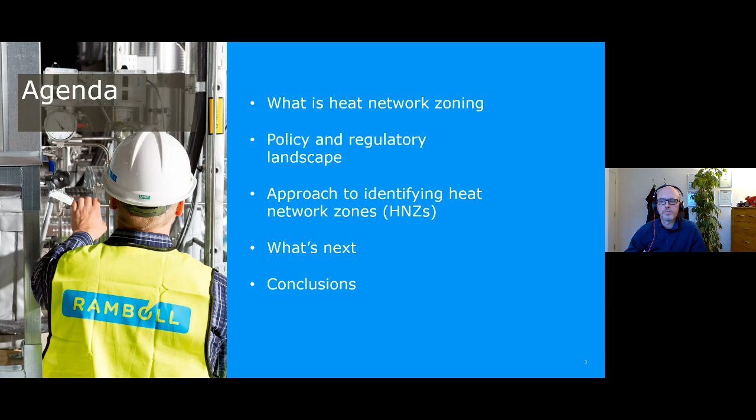So very briefly, what do we mean by heat network zoning? It's about energy planning, specifically for heat networks in this case. So we need to consider that a heat network is a long-term investment in energy infrastructure. It has the potential to cover very significant geographical areas, and by virtue of that, there are multiple stakeholders involved in both the planning and the delivery of district energy or heat networks specifically.

So when I talk about heat networks, we shouldn't overlook the fact that there may be opportunities for cooling networks as well to be developed alongside that. So the importance here is that because of the long-term nature of these infrastructural assets, they should be and need to be planned strategically. We're talking 50, 60, 70 year investment projects here.

The zones themselves are focusing on trying to identify where heat networks could be the optimal technology choice within a particular geographical area. So recognizing that there are multiple potential solutions to decarbonize heating, of which district heating is one, but by no means the only technical solution.

The typical approach, which we'll come on to shortly, is to be very much demand-led. So we're looking at areas where there is a high density of energy demand, of heat demand. But critically and importantly, as we move into the net zero future, we need to look at where there is availability of low carbon heat sources, of which Donna was referring to several in her presentation.

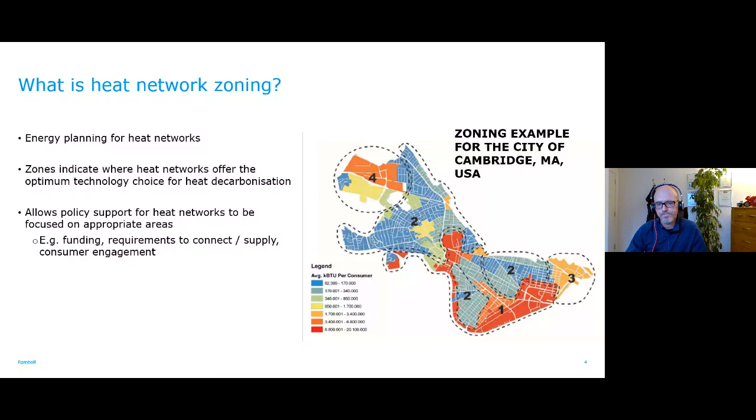The picture on the right is an example of some zoning that we've done relatively recently in a US city, in Cambridge. Next slide, please.

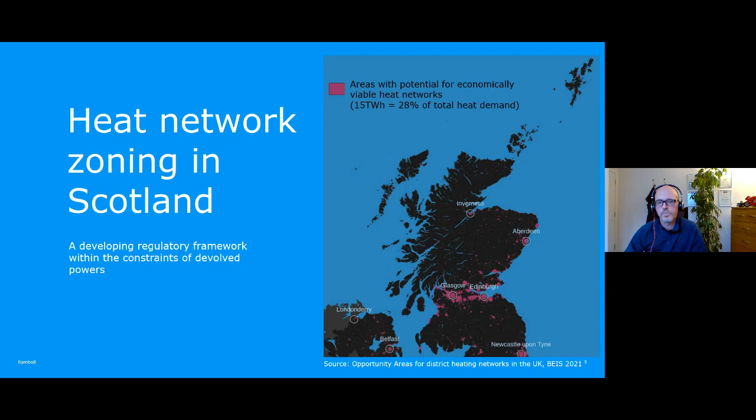The Heat Networks Act was legislated just this year, and that's a really interesting piece of legislation. And some of the key elements of that involve licensing of heat network operators. So the intention is to drive up standards and improve customer confidence in district heating, bearing in mind that it's still not a well-established technical solution in the UK. It will provide certain rights to the operators of networks, similar to what traditional statutory undertakings might already be used to and require to perform effectively.

Importantly, it will place duties on local authorities to review their regions in terms of the opportunity for district heating, and will give them the power to designate an area within their region as a heat network zone. And then lastly, there would be a permitting system. So it would provide the licensed operator with a permit, effectively an exclusivity to own, operate and develop a network within the zone.

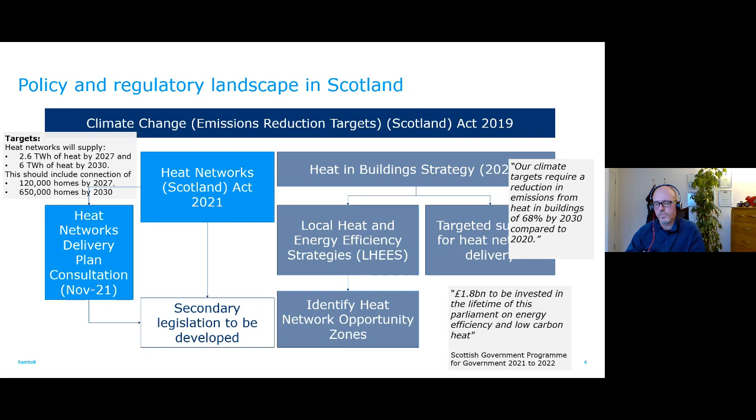So just in terms of an emerging approach, the Scottish Government's looking to achieve two fundamental things. One is to ensure that there is incentive for investors to come and participate. So it's not just about public sector, it's also very much about private sector capital, private sector entrepreneurship and initiative, but also networks need to be affordable to consumers. So there needs to be some level of regulation, is the implication of that, to ensure that customers are getting a fair deal.

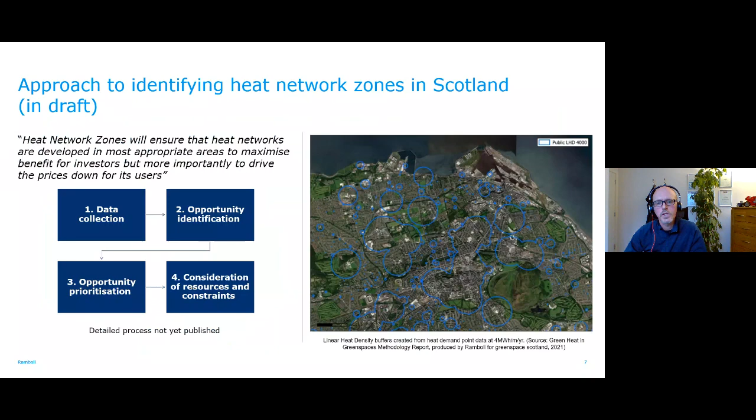Methodology continues to evolve. There'll be more guidance on that off the back of the heat networks delivery plan consultation mentioned earlier on. And of course, as I mentioned, the LHEES methodology, which continues to be tested through 2022. And lastly, just a couple of points around challenges. Devolution has brought a lot of powers to the devolved nations, but there are still constraints, particularly in the energy sector. The gas and electricity networks are not devolved. They're still controlled at a UK government level.

And also, there's a big impact of this scale of change in terms of skills, resources, capacity to deliver. Local authorities as the change agents, many of them are stretched, many of them don't have significant resources, and they need support. Next slide, please.

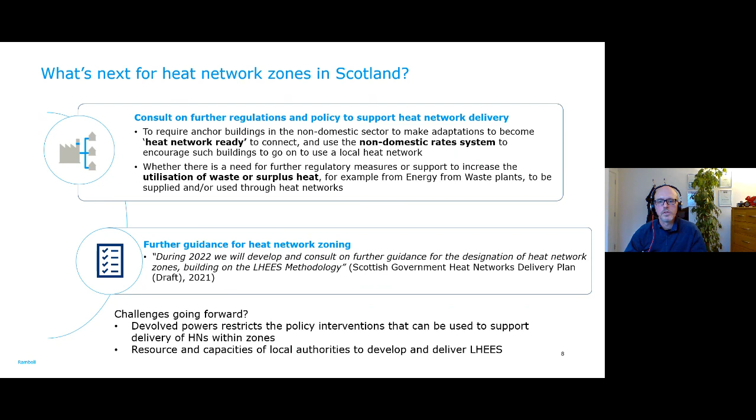I'm conscious I'm running on a bit, so please speed me up if I'm taking too long. I'd say five minutes, guys. So you probably have time to finish out your presentation. Sure, thank you, Dara. I'll accelerate.

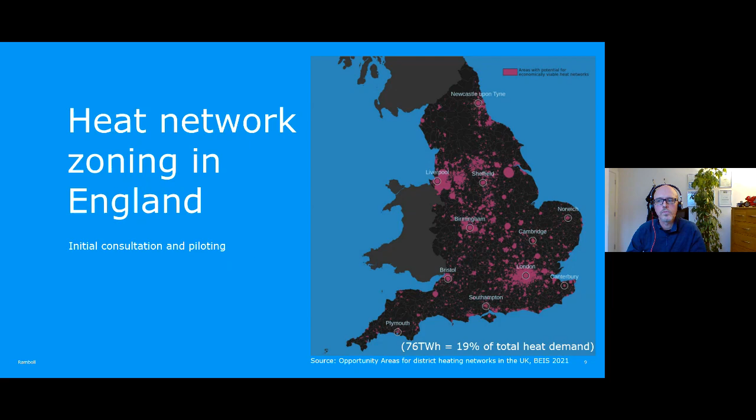There's a consultation being published by UK government on heat network zoning. It was published in October. The context of this is worth mentioning. We, along with other consultants, have been working with BEIS over the last 2 years now on looking at city-scale heat decarbonisation, of which district heating is an element.

And out of that work came the concept which we introduced around the value of zoning, the importance of zoning. So consequently, in parallel to this ongoing work, the methodology zoning approach has been developed through the course of this year, and that led to the consultation. England is looking at where zones can provide the lowest cost, low carbon solution, as you can see in the box there.

I've highlighted 3 key aspects to the consultation. One is about to what extent can consumers be mandated to connect. Second is about emphasising that this is now about low carbon heat. So we're moving away from the traditional gas CHP led district heating systems, which are prevalent across the UK right now. And the third point is about having a robust and standardised methodology.

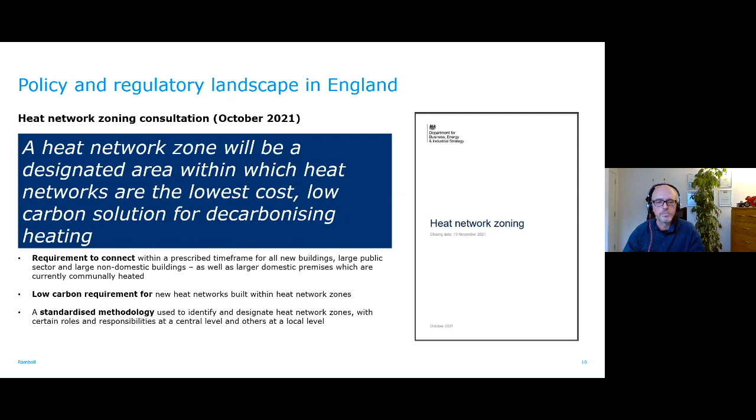Again, just quickly, methodology starts at a national level, identifying areas of opportunity, government led, moving into local. So this local is about refinement, it's about designation, it's about engagement with local stakeholders, and it's ultimately about delivery. And the second element is about the feasibility. So having designated the zones, it's about identifying specific networks within those zones, how they might connect up in time within and across zones, and then moving forward into a delivery pathway through procurement.

So in England, there is a funding mechanism to support that. There's the Heat Networks Investment Project, which has been ongoing, and that's now being superseded by what's called the Green Heat Networks Fund. So that's a capital-based support fund, hundreds of millions of pounds in there to support network development.

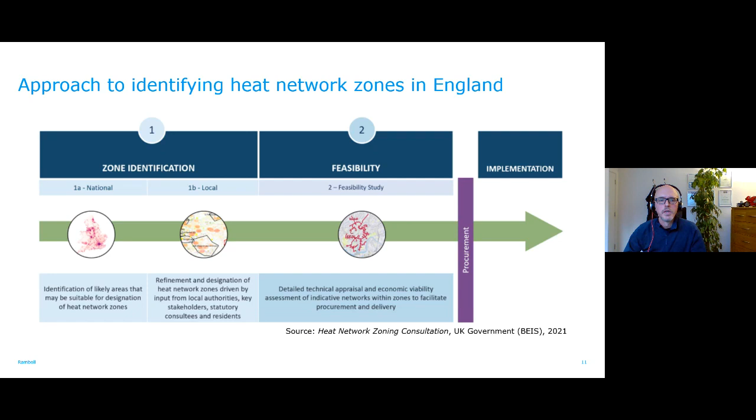Nearly finished, Dara. There will be a pilot now, which Ramboll has bid into to support the zoning pilots, which BEIS intends to roll out to 30 towns and cities, as you can see on the slide there. It's part of developing the evidence base around the methodology for zoning. That will start in Q1 and run for about 8 months. In parallel, the government will be looking at how to protect consumers, how to deliver regulation to ensure that consumers get a fair deal.

And some challenges. Well, there continues to be a disparity between the business as usual gas boilers versus the currently still more expensive low carbon solution alternatives. There's the issue around demand assurance. How far can government go in terms of mandating connection? There's the issue about low carbon heat supply and its availability, which is obviously critical to deliver these heat networks.

And then lastly, well, what happens if a zone is designated? How do consumers respond whilst there's that sort of limbo period, if you like, between when the network's available to connect and when potentially a consumer needs to replace their existing heating system?

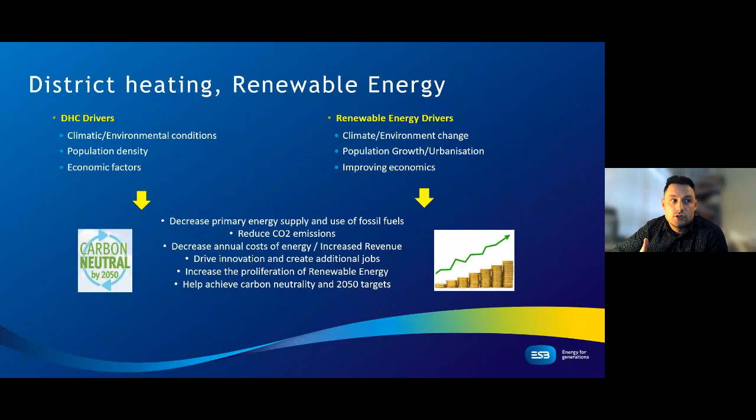Now you'll hear me talking about the scale and the size of it. It really is quite breathtaking when you see some of the photos later on, the sheer size and scale of it. It's an investor-owned project in Norwich and Bury. It's located around an hour north of London Stansted Airport in the east of England. So next slide, please.

So just to give you an overview of the main plant that we installed. Site 1 is the site at Crown Point, Norwich. That's just over a 16-hectare glasshouse, with Anglian Water treated final effluent about 2 kilometers away. We have 16 2.1 megawatt heat pumps. Apologies, there's a typo on the screen here, where it says kilowatt thermal demand and kilowatt electrical. That's actually megawatts.

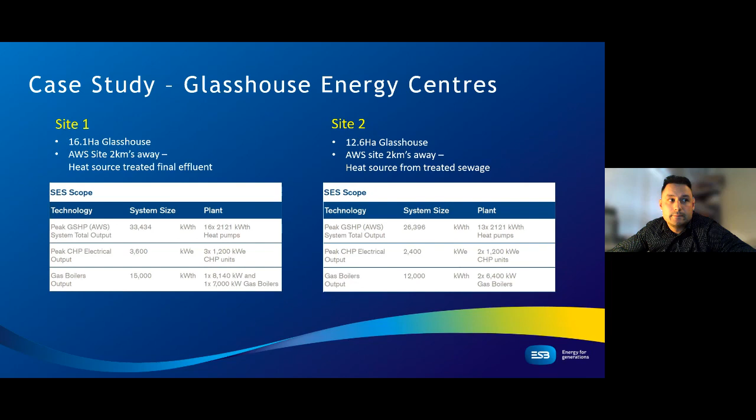Okay, next slide, please. So coming into the greenhouse energy concept, if I just start at the bottom of the slide here, basically on the Anglian Water site, there is a final effluent discharge, and right at the last leg of that final effluent discharge, we effectively tap into it, and we run that final effluent, which is temperatures anywhere from 10 to 25 degrees, into what we call an abstraction chamber. From that abstraction chamber, there is a series of submersible pumps located internally in the abstraction chamber. We then pump that from the submersible pumps through heat exchangers and directly back out then to the river, which is in the region of around about 3 degrees or above.

Okay, on the opposite side of that heat exchanger, there is the heat transfer fluid line. So the sewage heat recovery site to the energy centre is the 2 to 2.5 kilometre range, which I previously mentioned. So that's a continuous closed loop coming from the opposite side, which is actually an open loop. Okay, so the heat pumps take that temperature range from between 10 and 25 degrees, and they upgrade that heat by the refrigeration process on site to a usable upgraded heat in the region of between 35 to 55 degrees. Okay, that is sent into the low temperature thermal energy storage buffer vessel, which is then utilized and circulated throughout the greenhouse itself.

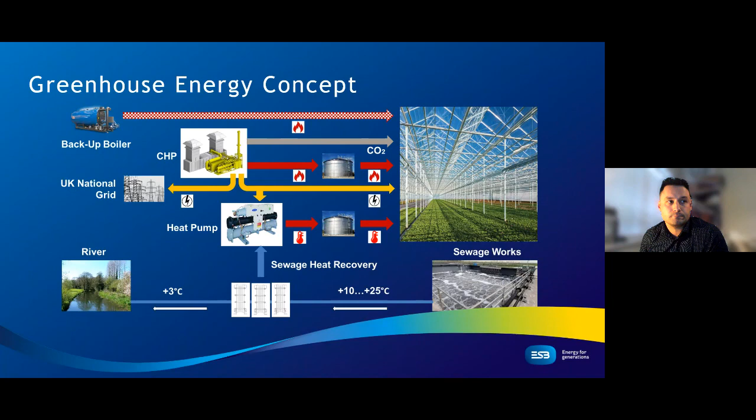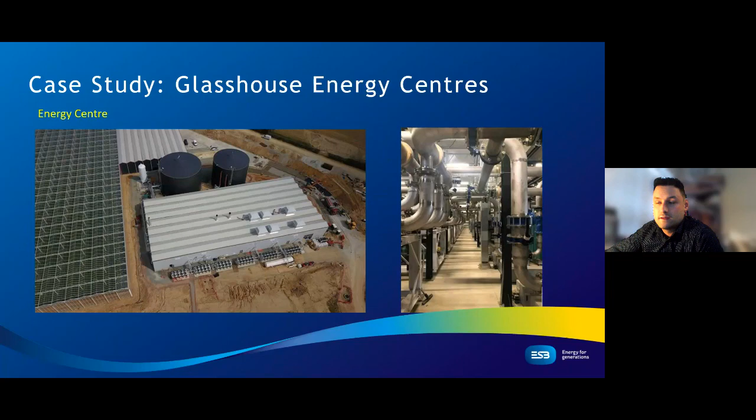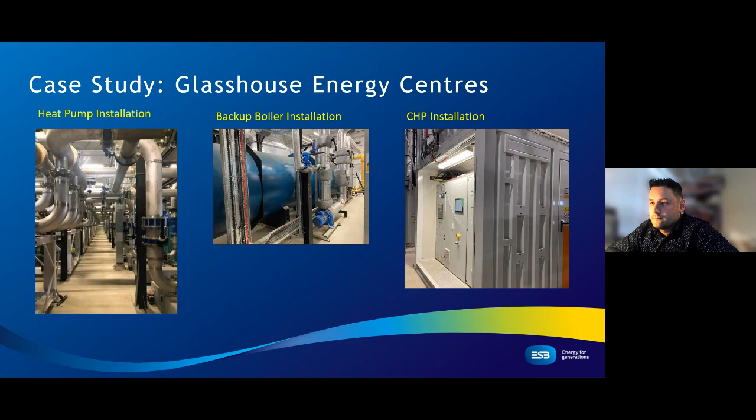So this is an aerial shot of the greenhouse at our Norwich site. The greenhouse you can see there is one of two across the Crown Point Norwich site. That one is in the region of around 8 to 8.5 hectares. The energy centre is that small building on the left hand side here, which I just showed you a blown up shot of.

Those packing houses on the Crown Point Norwich site are predominantly supplying peppers. The Crown Point Norwich site supplies up to around 13% of the UK's requirements, and the Bury site can supply up to 10% of the UK's tomato requirements, which is the equivalent of between 10 and 20 tonnes a day that those pack houses can take out from site. We've just finished the planting season for 2021, and we're preparing for the planting season in 2022.

The main message that I would like everyone to take out of this presentation is that this project gives an overview as to how combining several different sources of energy can provide a solution, but the end user doesn't necessarily have to be a greenhouse. It can be a block of flats. It can potentially be cities as a whole. The thermal demand that we're supplying is the equivalent of supplying up to potentially 20,000 homes in the capacity that we've delivered there. So moving into the next slide.

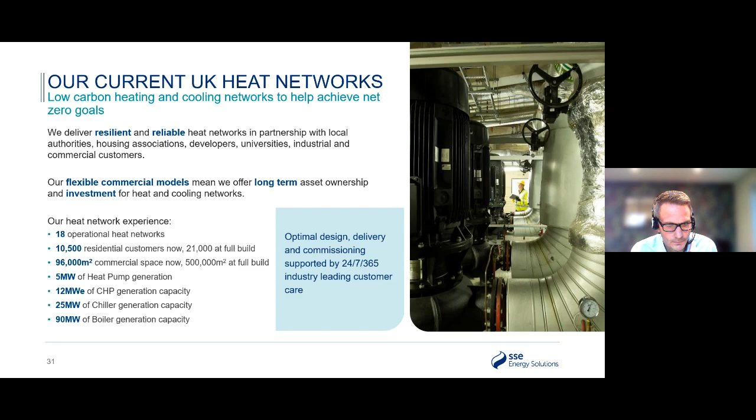So I just wanted to touch on an example of a project we're developing at the moment. Hopefully I can come back in a year or two's time and show you some impressive images of the site itself and the development work. But at this stage, we're at development stage. But I bring this one up because I think it's an interesting example at one end of the ownership model spectrum in terms of how schemes can be deployed. So this is a project in Leeds.

So we are working with the owner operator of that waste plant in collaboration with Leeds, who are effectively providing an enabling role. So they are effectively designating, not a zone in the formal way that Guy has described, but effectively an area in which we will work with their blessing and support to engage with potential off-takers for a new heat network. And where we started is with the all-important anchor load.

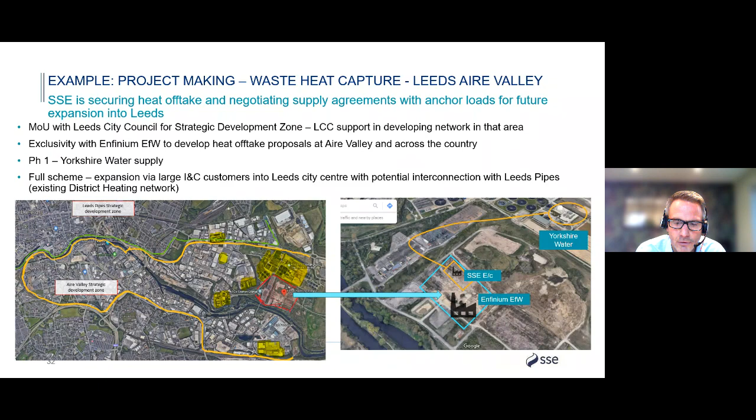I'm probably touching on a point that Donna was making earlier on. It then gives you this opportunity to have obviously multiple off-takers, but multiple sources of heat coming into that network over time, which takes you into all sorts of interesting areas in terms of ownership models. So just a good example of a very different type of project we're involved with, very different to the concession type schemes that we've got in London, for example. So next slide, please.

And what we see in the networks that we have predominantly adopted is a large range of designs, lots of different contractors, and effectively you're baking in a huge amount of system performance for the long term with that design. So getting that right from the start is so important. And we've seen, in recent years, the development of standards. I think generally the standard of design, with the likes of Ramboll, I should mention, bringing in that European expertise, is definitely improving. But it's so critical.

And just to pull out some practical examples: enabling plants to be easily maintained, easily replaced, for you to be able to bring in contingency plans. If the worst does happen, you need to bring in temporary plant. Ease of connection of those things, very practical things that you don't always get if you don't have the long-term perspective on a network.

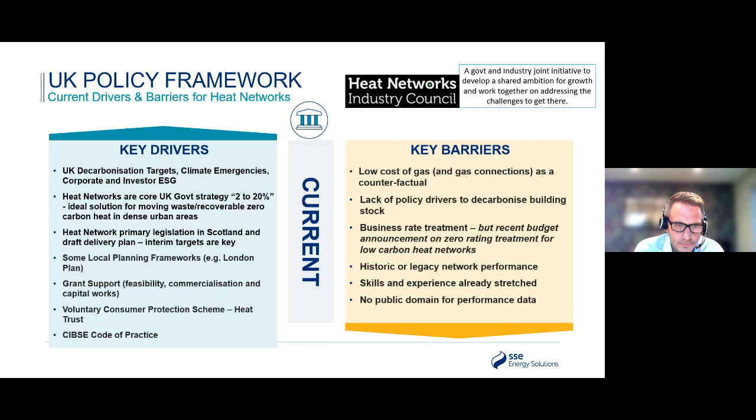And in terms of the future here, we've talked already about zoning. Agree, I think that's absolutely fundamental. I think we're starting to see the roadmap towards the end of natural gas, in terms of new properties, and UK government starting to talk about ambition for there being no replacement of gas boilers possible from the mid-2030s. Those two things are going to be, I think, fundamental. They start to create that roadmap and that journey. A bit like announcements around petrol and diesel vehicles, it starts to get people thinking about where they need to be in 5, 10, 15 years time, which is fundamental.

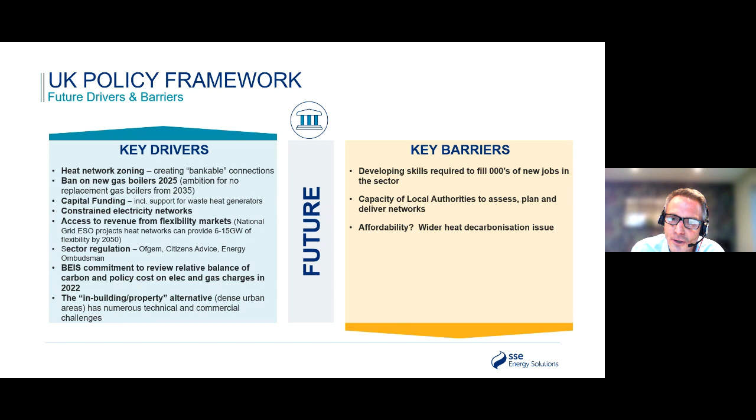and ensuring we can do this affordably. And that's where I think heat networks have got a key role to play, because to my mind, they're going to give us the best potential to provide affordable heat for people in the right areas, and keeping things as close as possible to where we are currently with gas costs. Perhaps not currently, but where we've been historically with gas costs. Next slide, please.

And generally, I would say the conclusion has been that a public-private partnership in some shape or form, potentially a JV, is very attractive, and it brings together what we think is a pretty complementary set of skills here. At one end of the spectrum, you have got the Leeds example that I gave earlier on, where effectively the local authority is enabling something to happen. To the other end of the spectrum, where the local authority might completely insource the entirety of the project.

But I would say, on balance, we sit somewhere in the middle, probably, helping the public sector to plan and deploy these networks with the skills and experience that we've got in the private sector. And I would say particularly that investor operator experience is really important. So businesses that have invested in and are operating existing networks and understand what needs to be done to make tariffs as low as possible and networks as efficient as possible is really key. So final slide, please.